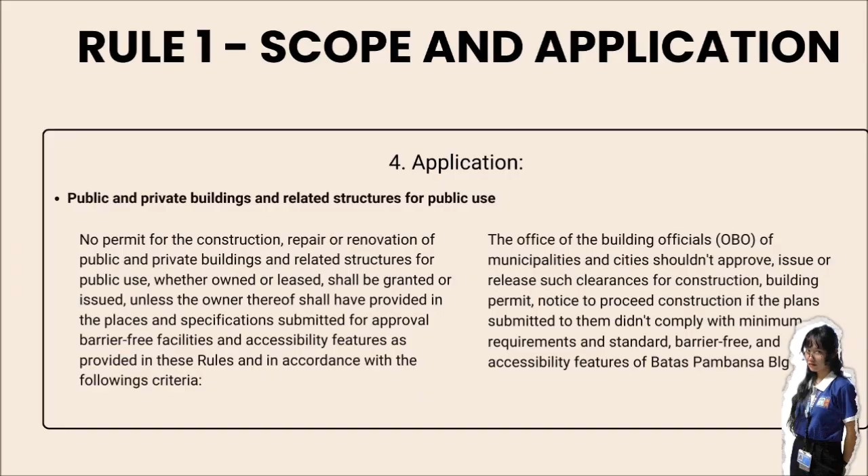These designs must follow specific rules and standards to ensure accessibility, like ramps, elevators, or other features that help people move around easily. The local government office in charge of building permits, called the Office of the Building Officials or OBO, will not allow construction to begin if the submitted building plans do not meet the basic rules and standards required by the law. Building and related structures to be constructed.

The areas of a building where its main purpose or activities happen, like a lobby, classroom, or store, must be accessible to people with disabilities. This includes making it easy for them to enter, exit, and use the facilities. However, if the building's main purpose can be served on the ground floor, where people enter, and that level is already accessible, then other floors don't necessarily need to meet the same accessibility requirements.

For government-owned housing, 10% of the total units must be designed to accommodate people with disabilities. If, after calculating 10%, the result includes a fraction greater than half, like 3.6 units, it must be rounded up to the next whole number, which is 4 units.

An example will be the total units of a building or a space is 105. So we multiply it by 10%, which is 10.5. This is a fraction. It will be rounded up to 11, which is a whole number. Because there's no such thing as half a unit, is there?

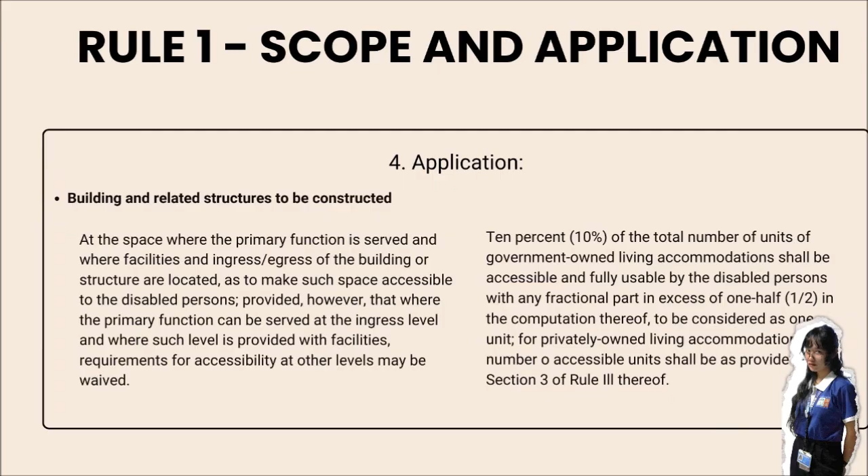Renovated structure. Any function areas of new designs or plans of structure to be reconstructed should be barrier-free. Access to elevator, accessible at any other level, should have a clearance minimum of 800 mm or 0.80 meters. Exception: emergency areas are not subject to barrier-free access, like hallways that provide fire hose cabinets and fire extinguishers. Providing signage for directing access should meet the standards of this code.

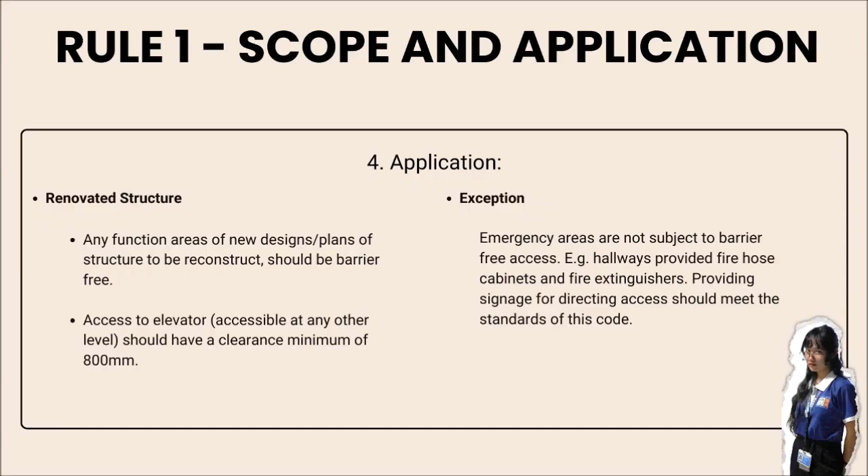On streets, dropped curbs and ramps should be constructed using non-skid floor materials to aid the sight-impaired and persons using wheelchairs. Audiovisual street signs and aids for pedestrian crossing, overpasses and underpasses may be waived. For existing streets and highways that have to be repaired and renovated, part of the entire pedestrian crossing should be included.

On transport vehicles for public use, public transport and facilities must provide seats and audiovisual aids for persons with disabilities. These requirements apply to buses, boats, ships, airplanes, trains, existing vehicles, and those under renovation. Public telephones must include accessible units, and transport terminals must meet accessibility standards for public buildings.

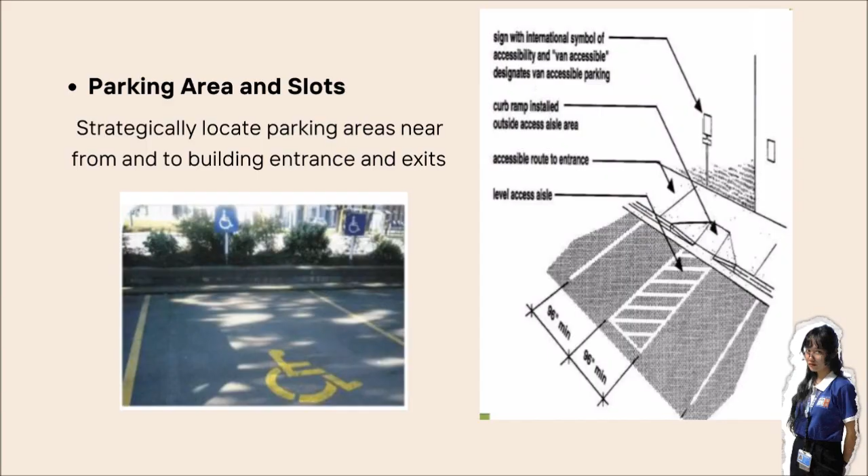Parking area and slots. Strategically locate parking areas near to and from building entrances and exits. Telephone booths accessible for disabled persons. Provide one telephone booth in a particular place that shall be accessible to disabled persons.

Rule 2. Minimum requirements for accessibility. Design criteria. So here are the 5 categories of persons with disability. First, physical mobility requiring a wheelchair. Second, difficulties in walking, needing braces or crutches, amputation, arthritis, and other illness. Third, individuals who are deaf and blind. Fourth, conditions of aging and incoordination. Fifth, developmental, behavioral, and emotional disabilities.

Rule 3. Specific requirements for buildings and related structures for public use. These are the classification of buildings by occupancy. Category 1, residential. Category 2, commercial and industrial. Category 3, educational and industrial. Category 4, agriculture. Category 5, ancillary.

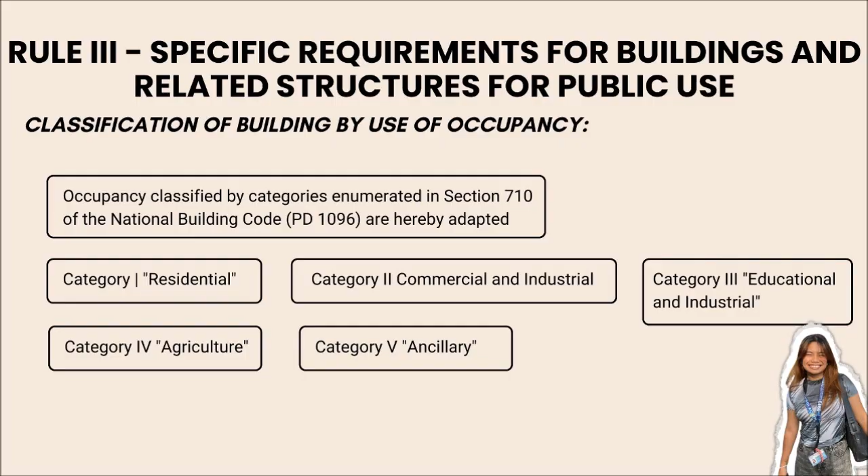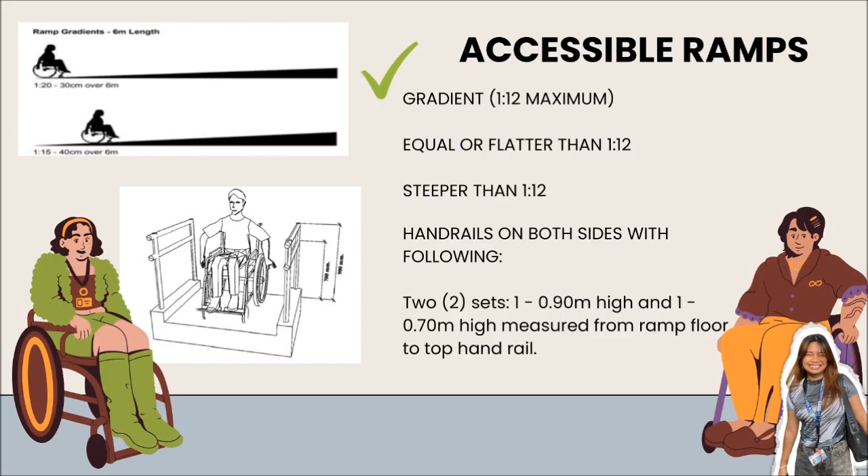Architectural features and facilities. So these are the architectural design requirements in accordance with generally accepted architectural practice. Accessibility features. Ramps. Given here in Figure A, the ramp dimensions. Accessible ramps should be equal or flatter than 1:12. Handrails on both sides are 0.90 meter high and 0.70 meter high measured from ramp floor to top handrail. Maximum length is 6 meters.

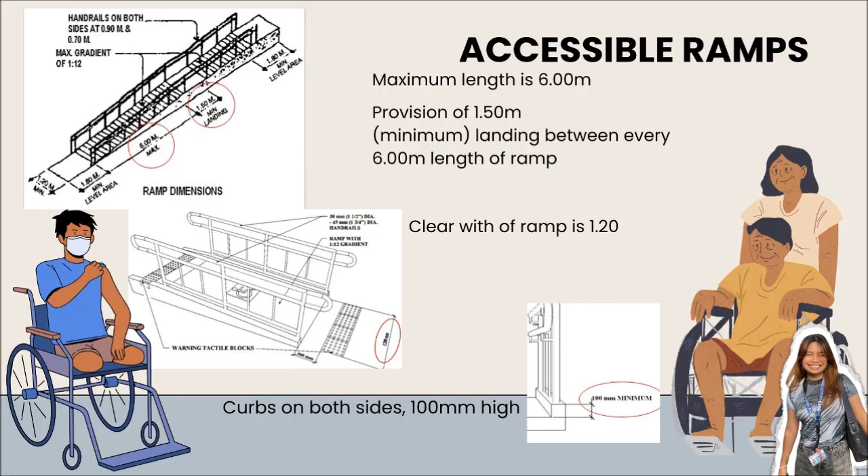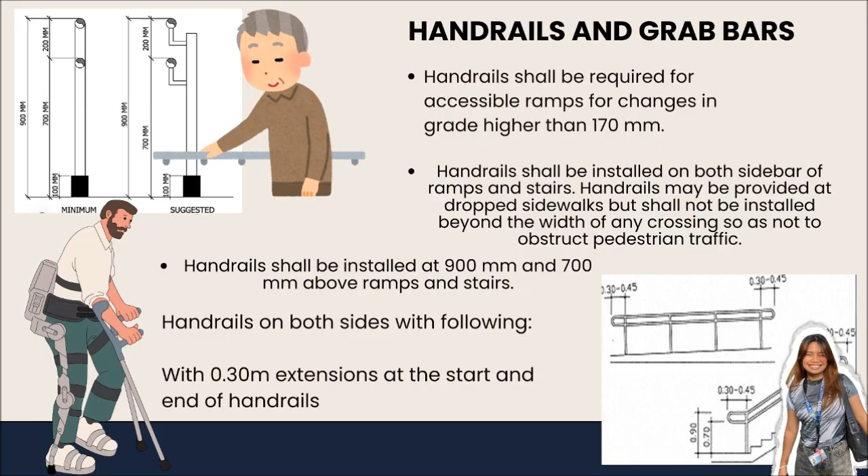Provision of 1.50 meter minimum landing between every 6 meter length of ramp. Clear width is 1.20 meters. Curbs are 100 mm high. Handrails and grab bars. Handrails shall be installed on both sides of ramps and stairs and should not obstruct pedestrian traffic. Handrails shall be installed 900 mm and 700 mm above ramps and stairs. It should have 0.30 extensions at the start and end of handrails.

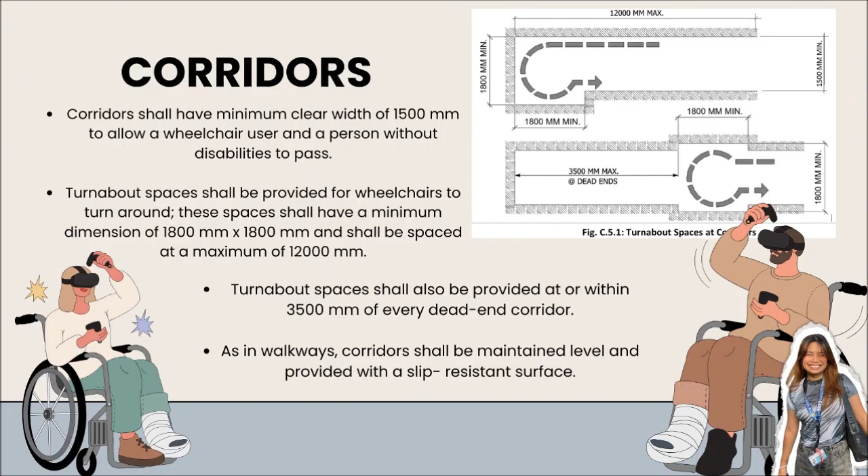Corridors. Clear width of 1,500 mm. Turnabout space of 1,800 mm by 1,800 mm and maximum of 12,000 mm. At every dead end of corridor within 3,500 mm turnabout space shall be provided. The dimension of toilet cubicle is 1.70 meters by 1.80 meters. Water closet, 0.40 meters measured from the center of the toilet bowl to the face of adjacent wall. Permit easy passage of wheelchair, 1.50 meters turning space. Door swings out, clear opening of door is 0.80 meters.

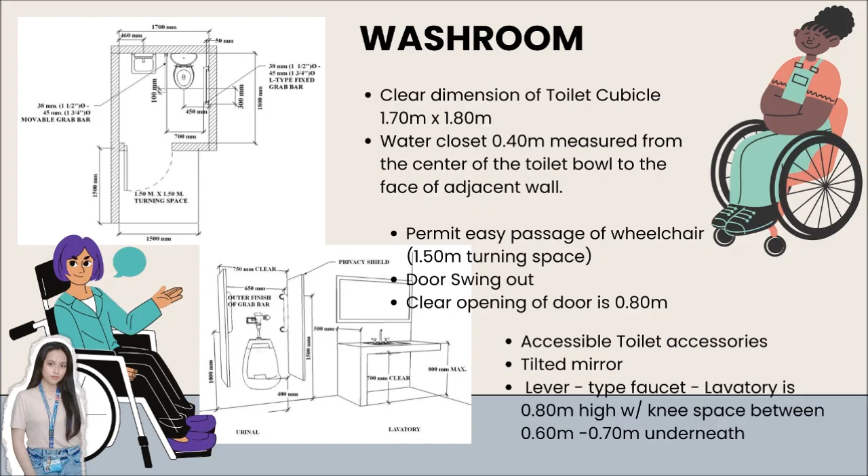Accessible toilet accessories: tilted mirror, lever type faucet, lavatory is 0.80 meters high with knee space between 0.60 meters to 0.70 meters underneath. Standard of accessibility for special type of facilities. Seating for the disabled shall be accessible from the main lobby to primary entrances. In all assembly places where seating accommodation is provided, there shall be spaces for the disabled persons as provided. When the seating capacity exceeds 500, an additional wheelchair seating space shall be provided for each total seating capacity increase of 100 seats.

Readily removable seats may be installed in these spaces when such spaces are not required to accommodate wheelchair users. Seating capacity of 4 to 50 has a wheelchair seating space of 2; 51 to 300, 4; 301 to 500, 6. Rule 4. Requirements for public transportation. Land transportation. These shall refer to buses having a minimum seating capacity of 50 persons for regular buses and 40 persons for air-conditioned buses. Rail transportation. These shall refer to the 3 railway systems in the country. Water transportation. These shall refer to the domestic passenger ships, ferry boats, and other water transportation.

No franchise or permit to operate public transportation units shall be granted, issued, or renewed unless such units are constructed or renovated in accordance with the requirements. If feasible, all owners or operators of existing public transportation utilities shall modify or renovate their units to accommodate disabled persons. The construction or renovation of public transport utilities covered by these rules shall be subject to compliance with the body designs and specifications. Posters or stickers shall be conspicuously displayed inside the units. Public transportation shall have designated seats for disabled persons.

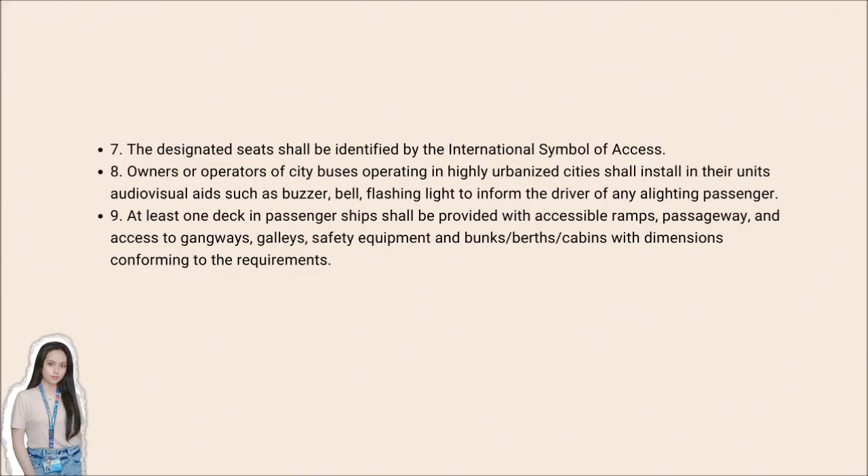Allocate on a per-class basis areas for disabled passengers. These areas shall be nearest to the entrance and/or exit doorways of the vessels. Give priority to disabled passengers' embarkation and disembarkation through the alignment of time windows. The designated seats shall be identified by the International Symbol of Access. Owners or operators of city buses operating in highly urbanized cities shall install in their units audiovisual aids such as buzzers, bells, flashing lights to inform the driver of any alighting passenger. At least one deck on passenger ships shall be provided with accessible ramps, passageways, and access to gangways, galleys, and safety equipment. Rule 5. Administration and Enforcement.

Buildings and related structures including public transport terminals, streets and highways, Land Transportation Franchising and Regulatory Board, Land Transportation Office, Philippine National Railways and the Light Rail Transit Authority, Maritime Industry Authority, Philippine Ports Authority, Civil Aeronautics Board, and Air Transportation Office. Section 46 of RA 7277, also known as the Magna Carta for Disabled Persons, stipulates that anyone who violates the rules and regulations of this act shall face penalties. For the first violation, a fine of 50,000 or more may be imposed, with imprisonment for up to 2 years or more at the discretion of the court.

For subsequent violations, a fine of 100,000 or more may be imposed, with imprisonment for up to 6 years or both at the discretion of the court. Abuse of these privileges may result in imprisonment for up to 6 months or a fine of 50,000 or both. If the violator is a corporation, organization, or similar entity, the official directly involved will be liable. If the violator is an alien or foreigner, they will be deported immediately after serving their sentence without further deportation proceedings.

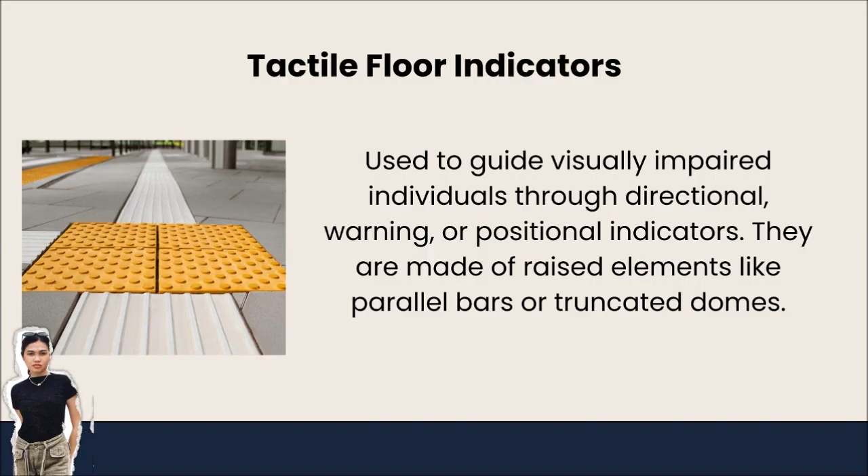The accessibility law of the Philippines mandates signage and symbols to ensure public spaces accommodate persons with disabilities. These include the International Symbol of Access, ISA, which designates accessible routes and facilities, and tactile signs including braille and embossed symbols installed at a height of 1.5 meters from the floor. Tactile floor indicators guide visually impaired individuals through directional, warning, or positional indicators. Signages should maintain a luminous contrast of at least 30% from the background and non-glare finishes to enhance visibility. The dimensions of symbols, letters, and numbers depend on the viewing distance, ensuring readability from various ranges.